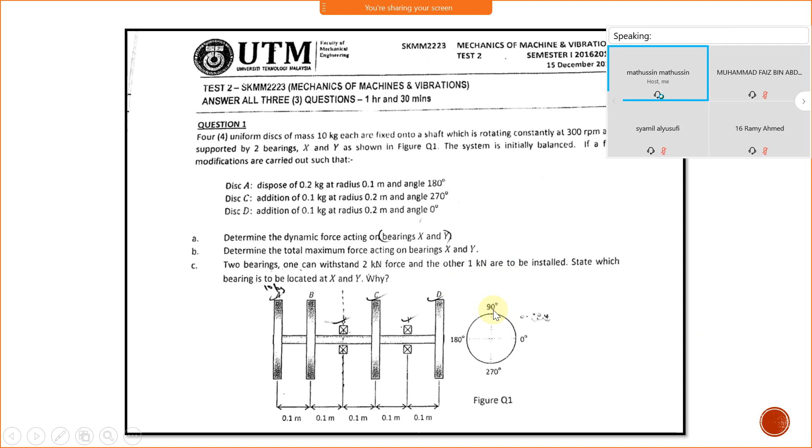Just we'll have a look at one or two questions regarding this topic. Okay, so we look at the first exercise. This one is from previous tests, from 2016 and 2017.

Alright, this is about question number 1, about balancing.

Okay, so we look at this one. Four uniform discs of mass 10 kg each are fixed onto a shaft which is rotating constantly at 300 rpm and supported by two bearings. Two bearings X and Y as shown in figure question 1. The system is initially balanced if a few modifications are carried out, such as...

A, we dispose of around 0.2 kg at radius 0.1 meter and angle 180 degree. Then we modify C by adding 0.1 kg at radius 0.2 meter and angle 270 degree. And last, we modify D by adding 0.1 kg as well at radius 0.2 meter and angle 0 degree. So this is our reference angle, right?

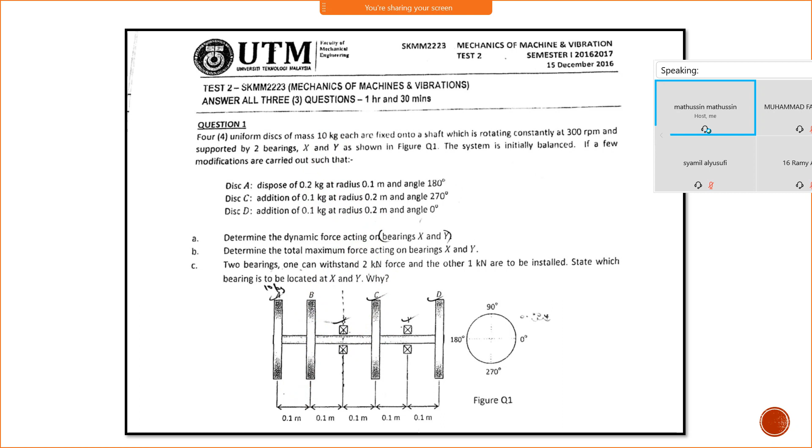So the first step is, of course, we need to tabulate our table, the MRD table. What we can include inside the table is, of course, we need to consider A, C and D, and also the reference of shaft, which is X and Y, because we need to find the dynamic force acting on bearings X and Y.

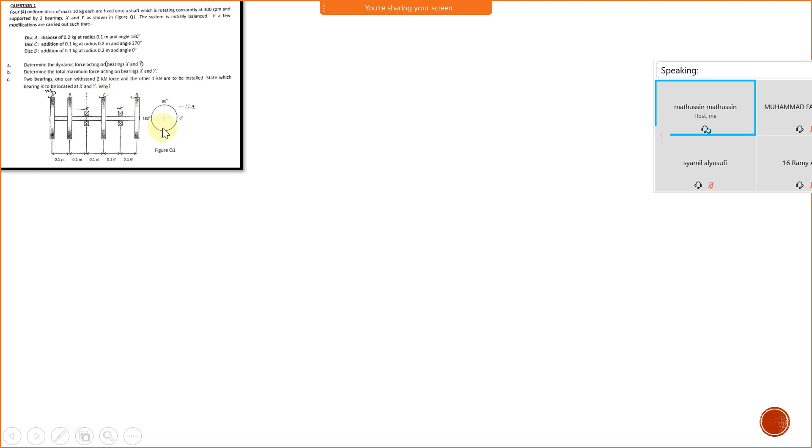Okay, so our table: just construct your table, the MRD table. We have plane, MR, D, MRD, and last we have theta. So this is plane, MR, D, MRD.

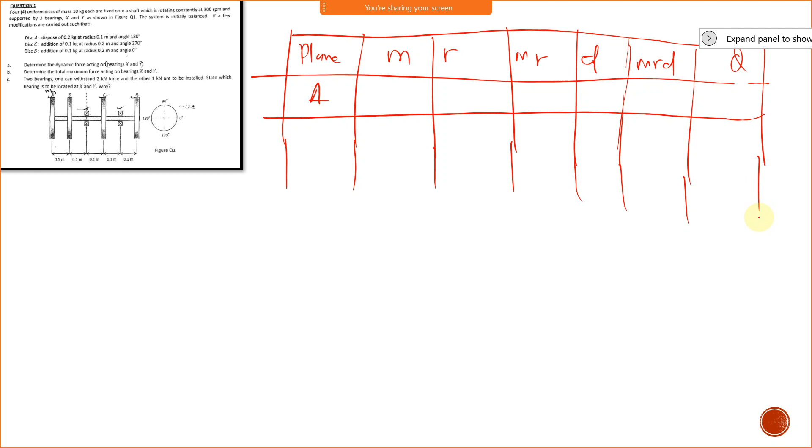Okay, we have plane A, and then we have reference, we have shaft X, and then we have C, and last we have D.

Okay, so what is our M of modification, which is negative 0.2? Dispose A with negative 0.2 kilogram, and then radius is 0.1, so what is our MR? Negative 0.02. And how about D?

Alright, D, we take X as our reference. You can choose either X or Y, it's up to you, but I think X is easier, isn't it? So what happens to our D of A, from X to this A? We assume negative to the left and positive to the right. So D of A is negative 0.2.

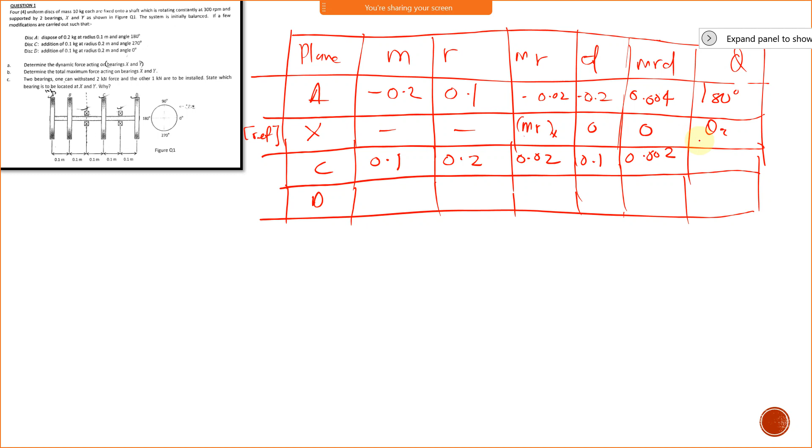And last we have D, which is 0.1. Positive or negative? Positive. And R is 0.2. MR is 0.02. And then D is 0.3, from reference to D, which is 0.3. MRD is 0.02 times 0.3, which gives 0.006 with angle 0 degree. So this is our MRD table.

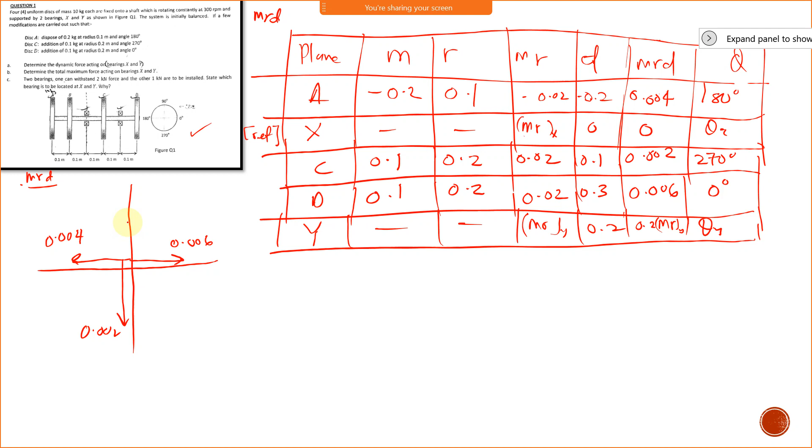So for this case we just resolve it to x and y components. Then what we have, first is this is our 0.2 MRY y, okay, and the other one is 0.2 MRY x. Okay, this is x and this is y. Then we just resolve it with x analysis.

All right, so we have 0.2 MRY x plus 0.006 minus 0.004 equals to 0. Then we can obtain the value of MRYX. So cuba kira dapat berapa? 0.006 minus 0.004 and then bahagi 0.2. So negative, isn't it? So negative 0.01. Negative meaning to say that MRYX must be 0.01 to the left.

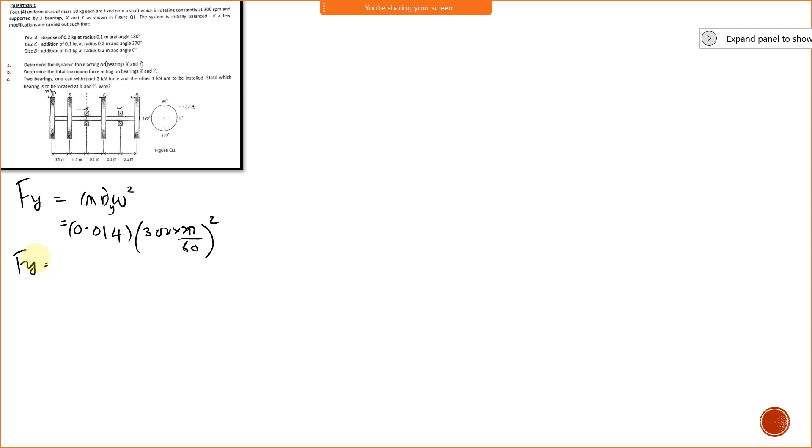Then our Fy must be 13.8 Newton, betul? 13.8 Newton with angle 45 degree. Okay, and then kita nak buat satu lagi MR analysis. This is MRD analysis, so this is MR analysis untuk dapatkan X pula.

Kalau tak perlu buat table baru, just refer to this table boleh juga. So for MR analysis we just take this one and refer to this one. Since kita dah dapatkan MRY tadi, just put it in our table, which must be 0.014 with angle 45 degree. Refer back to this table, then buat X analysis balik. So what we have, kita lukis balik.

Kita lukis balik, so kita ada MR negative 0.02 with angle 180. So negative maksudnya sini, tapi kita letak negative 0.02. This is for plane A, and then for MRX, unknown, kita skip dulu. Kita ambil C: we have 0.02 angle 270, which is downward, and then for D we have also 0.02 but angle is 0, betul? Then last one we have 0.014 with angle 45 degree.

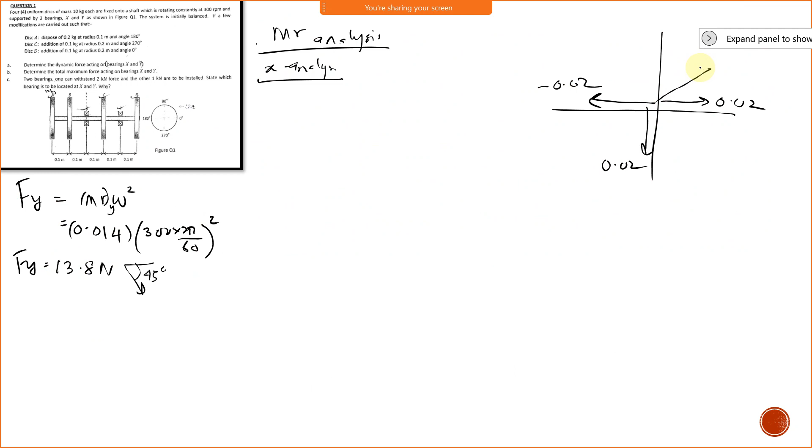45 degree kat mana? Refer balik dekat kita punya reference table dekat sini, then 0.014 must be somewhere here, 0.014. And last one we put our unknown. What is our unknown? We have MRX and MRY. So this is second quadrant. Apa dia? Second quadrant ni.

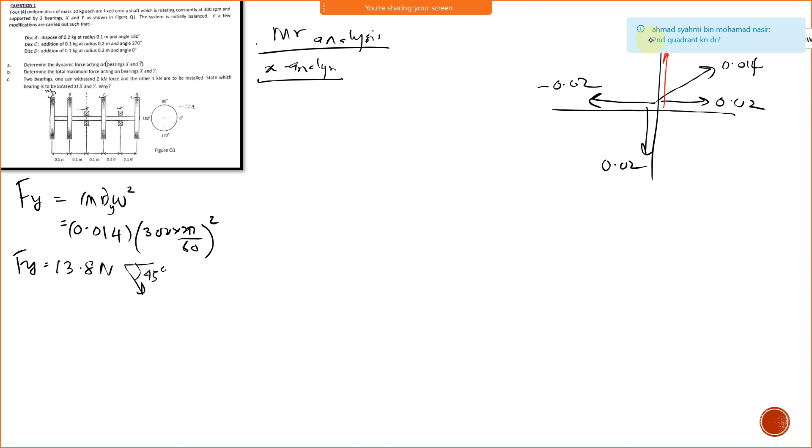Sorry. Untuk Y, oh sorry, betul-betul. Sebab kita dapat negatif kan. So our direction must be second quadrant, somewhere dekat sini, 45 degree. So 45 degree must be second quadrant because MRY is negative, so kena hati-hati dekat sini. You must be very careful on that point. So it should be second quadrant.

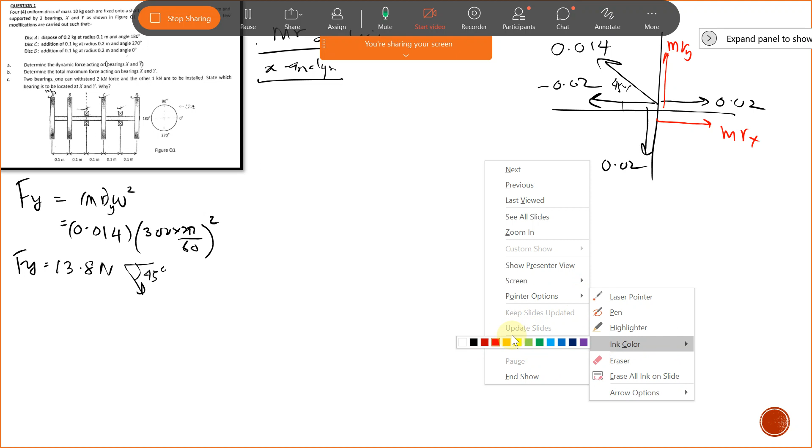45 somewhere here. So 0.014. Okay, with 45 degree. Alright, okay. So next is, so we have MR, MRY, and then we have MRX. Okay, so what we have is, for X analysis, what we have: MRX, sorry, should be MRXY. So this is MRXX. Okay, so MRXX.

MRXX plus 0.02 minus 0.014 cos 45 minus negative 0.02 equals to 0. Okay, so then we can obtain what is our MRXX. So berapa? Cuba kira. So we have 0.02 minus 0.014 cos 45 plus 0.02, then we have a negative, isn't it? So negative 0.03. Okay, and then after that we need to find Y analysis pula.

So what we have: MRXY plus 0.014 sine 45 minus 0.02 equals to 0. 0.01. Yang mana ni 0.1 ni? Jawapan dia ke? 0.01 ke 0.0? Okey, MRY: 0.014 sin 45, negative 0.01. So 0.01. Syami ni advance sangat ni.

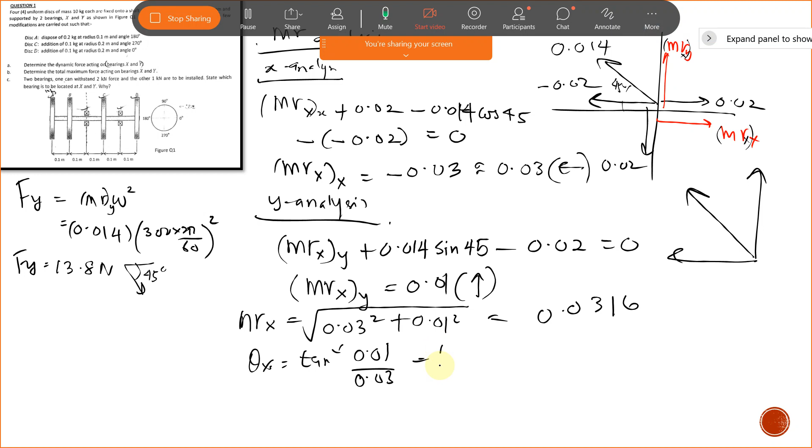Then what is our angle? Inverse tangent 0.01 divided by 0.03, 18.43 degree. Alright, so once we get MR, then we can actually find what is our Fx, which is MRX omega squared. Kat sini salah ni, should be sini kan, 45 degree.

Okay, this one, 0.0316 times 300 times 2 pi over 60 squared. So Fx must be 300 times 2 pi over 60 squared times 0.0316. So 31.2 Newton with angle 18.43 degree. So this is our answer for A. Okay, any question?

Tak perlu, kalau nak buat pun boleh. Alright, tak perlu. Nak buat pun tak ada masalah. No need to worry about it. Sebab sama je, kalau kita construct MR table, then we just only take up to MR, and then we consider theta. No need to consider D.

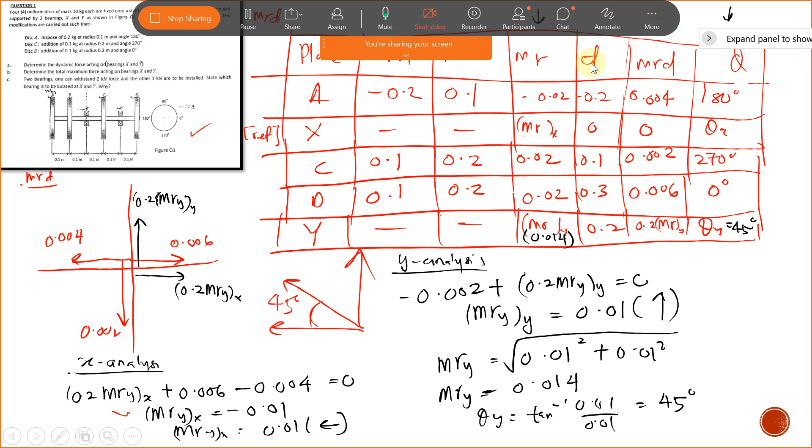Is there any way to reconfirm our answer, either right or wrong? Macam mana nak confirm? Boleh, you can actually do another method, which is polygon method, by using a real scale. For example, if you assume 1 cm equivalent to 0.01 kilogram meter, then you can construct the polygon shape, because from there you can reconfirm that your answer is correct or not, because at the end the answer must be the same.

You can study how to use that method, because I think the method is already mentioned in your module, isn't it? But I not recommend you to use that method, because it involves real scale. So kalau guna skala yang salah, maksudnya salah jawapan. But this method is the easiest way, I think, to get the answer. Tapi boleh try, tak ada masalah. You can try it by your own. Any other question? No?

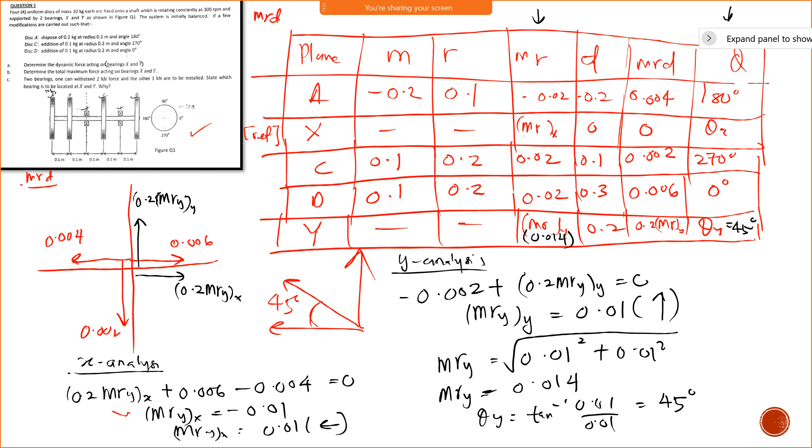Okay, question number B. I think this is very critical, because we need to find the total maximum force acting on bearings X and Y. So macam mana nak buat? If we're talking about total maximum force, we need to consider two types of forces. First is dynamic force, and the other one is static force.

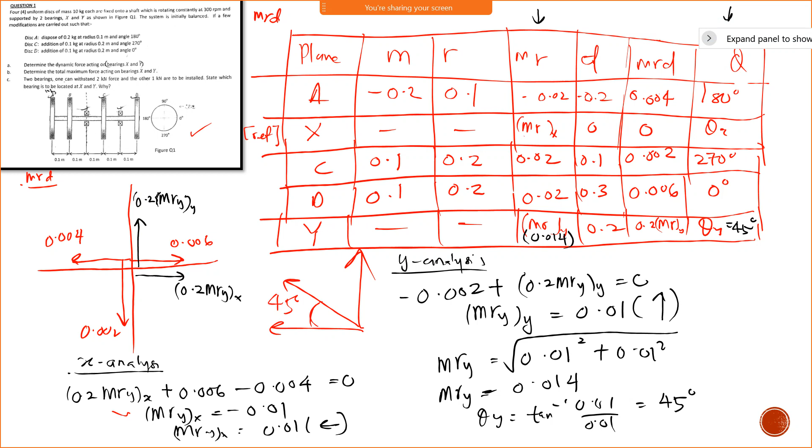How to find it? We do some analysis on the shaft first. This is our shaft, question number B. So for static analysis, we always assume that the direction of reaction force acting on the shaft must be always acting downward, opposite to the reaction acting on the bearing. Direction dia tak sama arah lah.

So apa yang kita ada: point A dekat sini, we have point B, we have bearing X, and then we have C, we have Y, and we have D. So how to consider our value of mass?

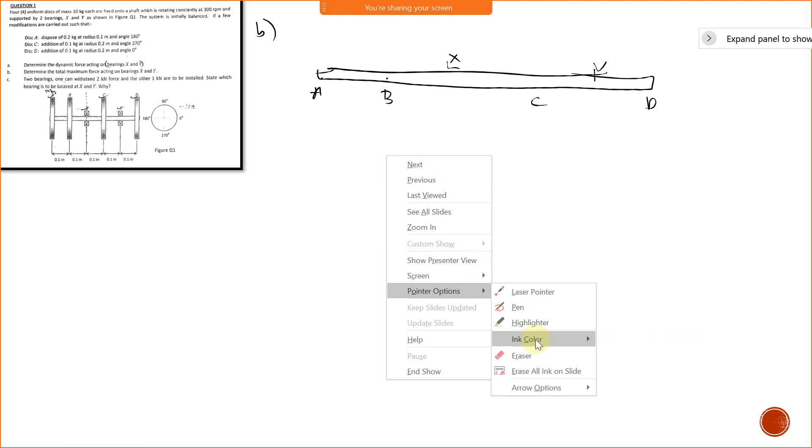What is our A? A adalah dia dah dispose kan, so apa baki mass yang tinggal? Siapa yang tanya semalam should we use 10 kg ataupun kita kena guna mass yang dah dimodified? Alright, so saya beritahu semalam kena guna 10 kan, but the right answer is you need to use the mass after modification. Because the question is regarding the mass after modification, not before modification.

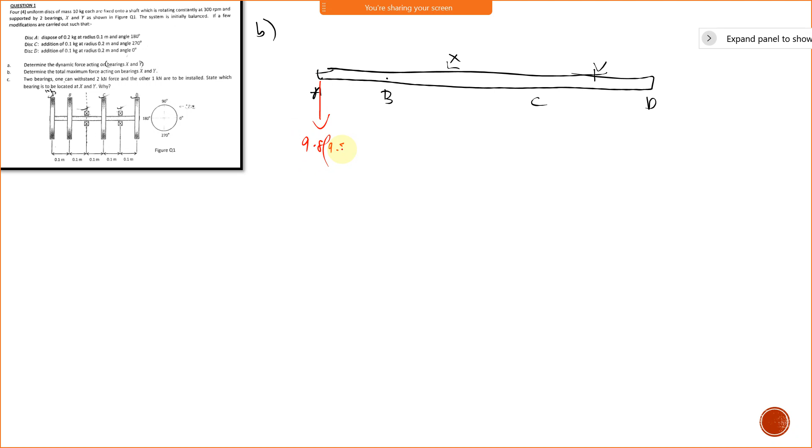So mass of A should be berapa after dispose? So what is our mass left? Berapa? Sepuluh tolak dengan 0.2 kan, so should be 9.8 acting downward. So 9.8, 9.81, which is g. Okay, and our distance is 0.1 over here.

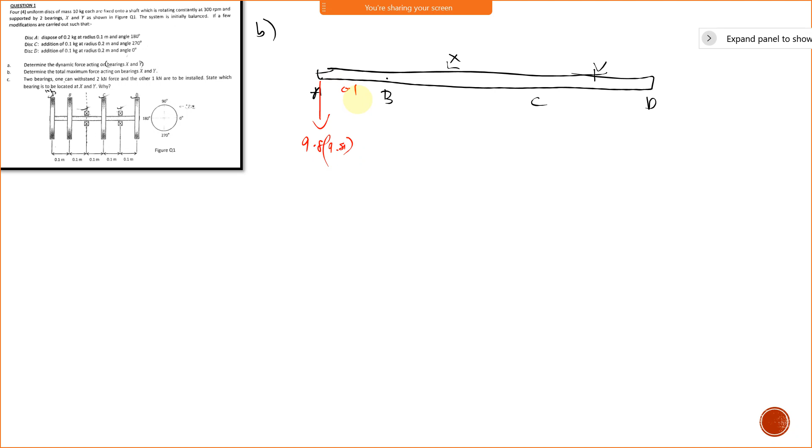And how about B? No modification on this B. So what is our mass for B? Maintain 10 kilograms. So 10 times 9.81. How about C? C is addition, so we have 10.1. Betul? 10.1, 9.81. And then last one we have D, also addition: 10.1, 9.81.

With shaft reaction Rx upward and Ry also upward. Okay, we do analysis on the shaft, not on the bearing. Then at the end of our answer, you just need to change your direction of reaction at X and Y. So distance is 0.1, X to C also 0.1, this is 0.1, 0.1.

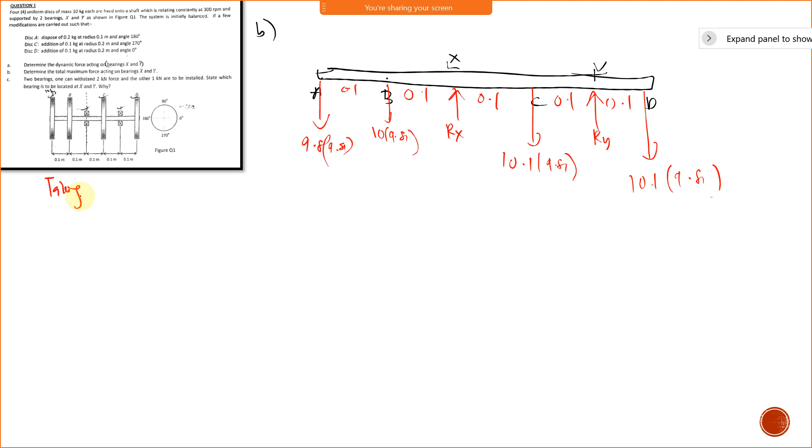Okay, so taking moment about any point, for example, about point Y. We assume positive to clockwise. So first we have negative 9.8 times 9.81 times distance from Y to A. Berapa? 0.4. And negative 10 times 9.81, distance is 0.3. And then we have plus Rx, distance is 0.2.

Okay, and then apa lagi? Kita ada negative 10.1 times 9.81, distance is 0.1. And last one we have positive 10.1 times 9.81 times 0.1 equals to 0. Alright, cuba dapatkan what is our Rx. Find what is our Rx.

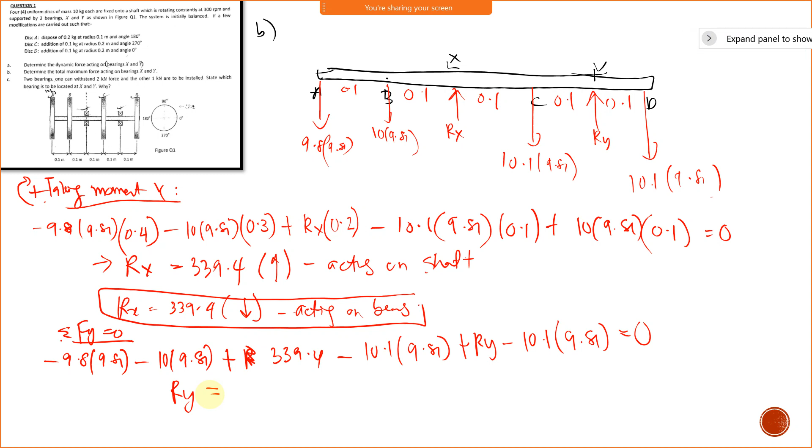So 339.4 minus 10.1 times 9.81 plus Ry minus 10.1 times 9.81 equals to 0. Alright, so dapatkan your Ry berapa? 53, betul eh? Cik Syami je jawab, yang lain mana ni? Betul eh? 53.

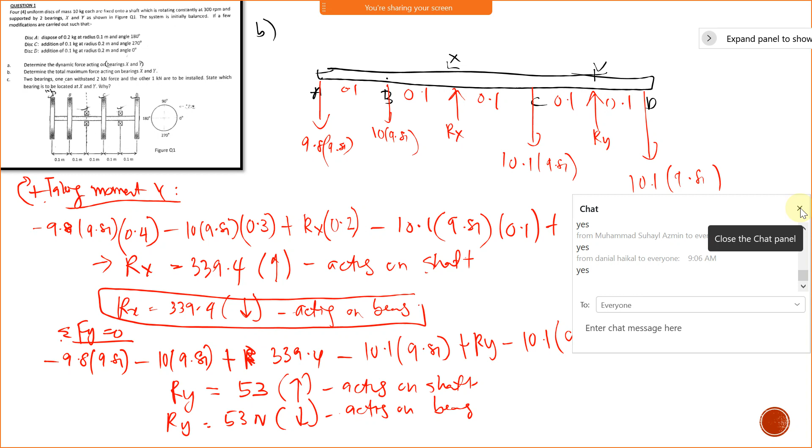53, direction is upward, acting on shaft. So Ry acting on bearing must be 53 Newton downward. Alright, so this is not a maximum. How to find the maximum force acting on bearings? You need to combine your dynamic force and also static force. What we did is analysis of static force, right?

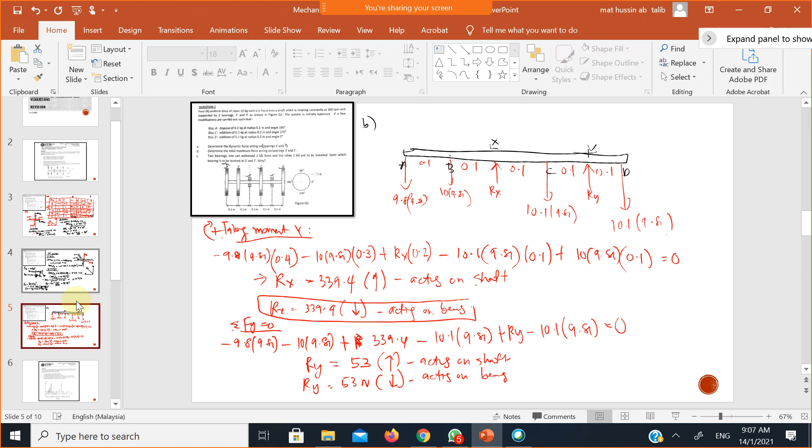Sekejap, saya tambah satu lagi. So how to find the maximum force acting on bearings X and Y? Total maximum force should be dynamic force plus static force. So kena hati-hati, kena fahamkan soalan betul-betul apa yang dia nak.

Kalau dia beritahu maximum force ataupun maximum dynamic force, those are two different things, you must know. But the question is, we need to find total maximum force, maksudnya total maximum daripada dynamic force dan juga static force. So F max for X should be, berapa kita dah kira tadi? Fx tadi berapa, yang mana?

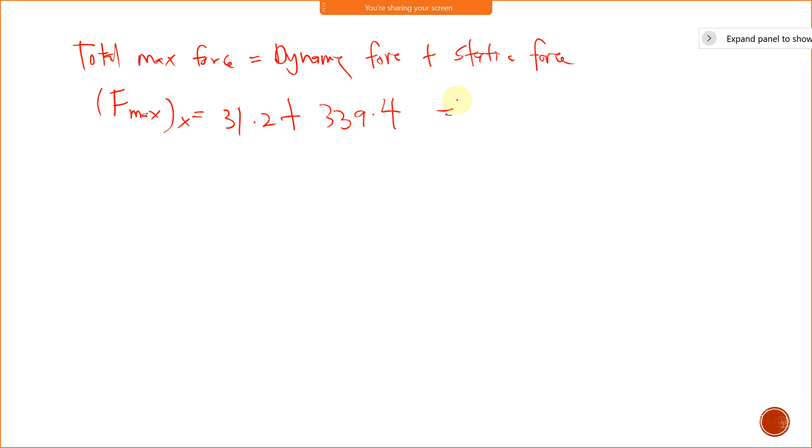31.2 plus Rx, 339.4, betul. So what is our answer? 31.2 plus 339.4, then the answer should be 370.6

Newton. And F maximum for Y should be: the dynamic force for Y is 13.8 plus maximum static force for Y is 53. So the answer must be 13.8 plus 53, so 66.8 Newton. So that is our answer. Alright, is that clear? Ada soalan nak tanya?

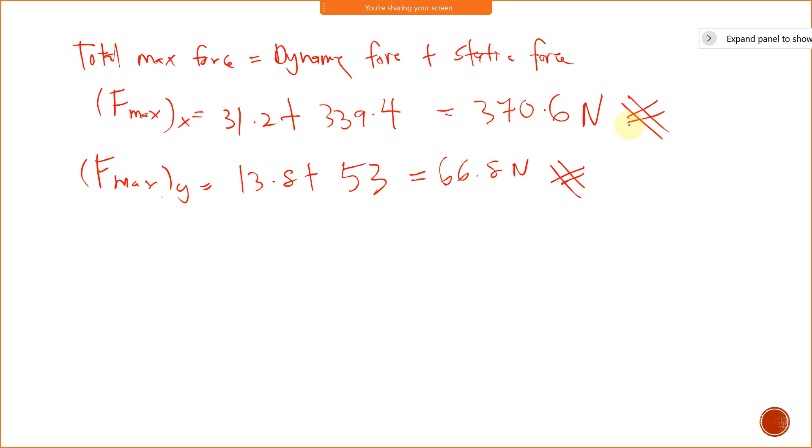Okay, soalan C, dia beritahu apa kat situ? Two bearings, one can withstand 2 kN force and the other one 1 kN are to be installed. State which bearing is to be located at X and Y. So bearing yang ada 2 kN, yang mana yang lebih sesuai untuk kita install, sama ada dekat position X or Y. Bearing 2 kN, which point? X or Y should be installed yang 2 kilonewton.

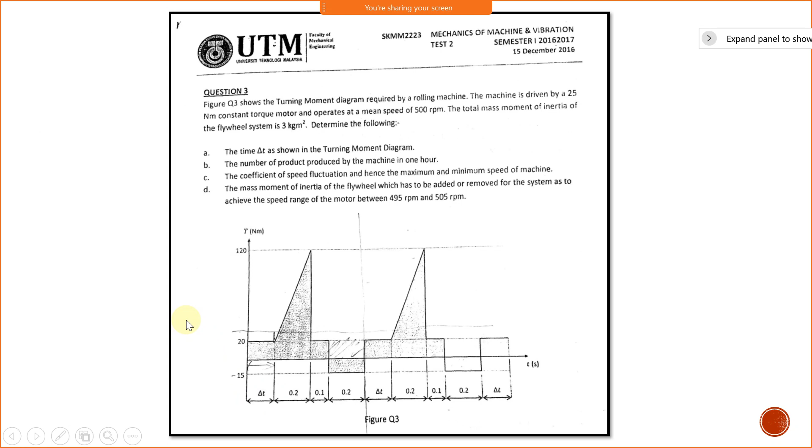Okay, so first adalah we are given T apa? Kita ada T mean, isn't it? T mean is given 500. T mean pula. Kita ada T mean is 25 Nm and also we have mean speed. Omega mean is 500 rpm. Okay, so total mass moment of inertia of the flywheel system is 3 kg meter squared.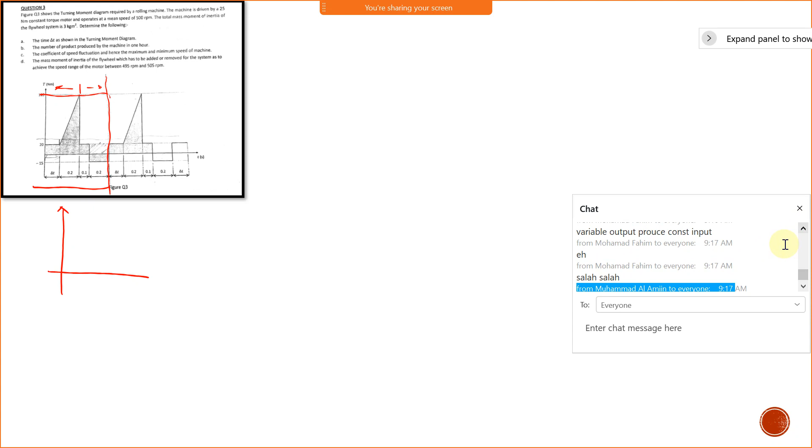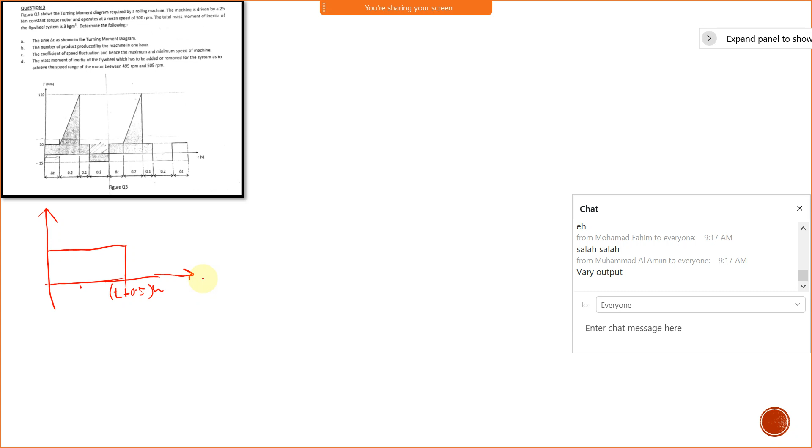Okay. So this is one complete cycle. Alright, kita tak tahu one complete cycle kat sini. Kita ada delta T. T plus berapa ni? One complete cycle 0.5 kan? So this one should be T plus 0.5 omega. Alright, you need to make sure that this one must be in terms of theta lah. Theta equals to T omega. Okay, so this is our T mean by T constant is 25 equals to, saya buat kat bawah lah, equals to, we have 20.

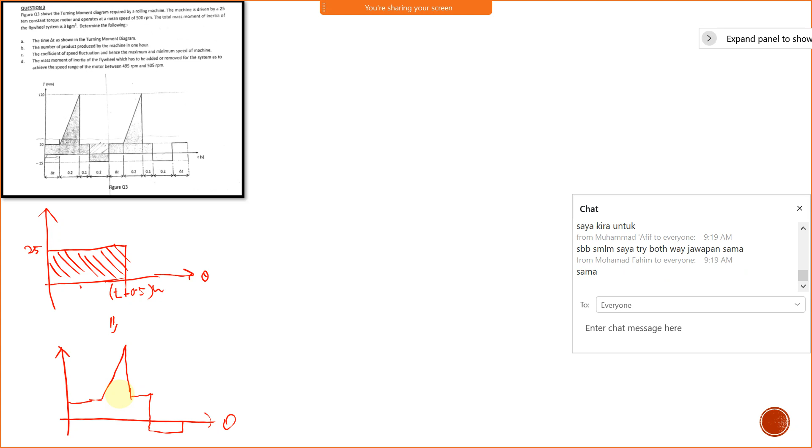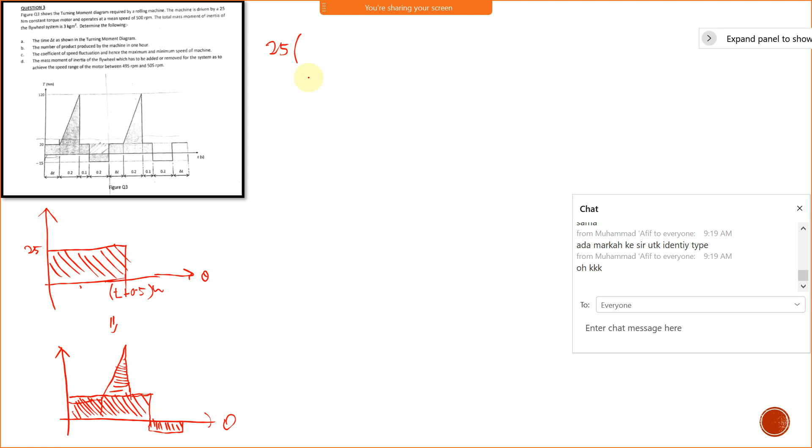So kita bagikan yang mana yang paling senang, kita bagi macam ni lah. This is our first area, this is our second area, and this is our third area. Okay, boleh? So kita ada T mean 25 times with T plus 0.5 omega equals to, yang kat bawah macam mana? Kita ada 20. Nombor 1, nombor 2, nombor 3. So we have 20 times with T plus 0.3. Is that correct? 20 times T plus 0.3, this area.

And then as number 2 kat sini berapa? Plus 1 over 2 times 0.2 times with tinggi adalah 100. Betul? 100. Is that correct? Okay. And last one, kita ada yang dekat bawah should be plus negative. Ni you need to consider negative lah. Negative 15 times with 0.2 equals to 0. Sorry, tertinggal omega. Alright, omega. So, dapatkan T. So, what is our T?

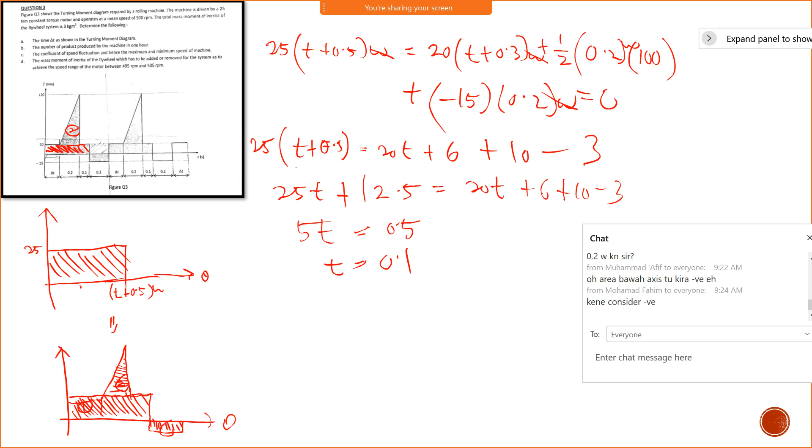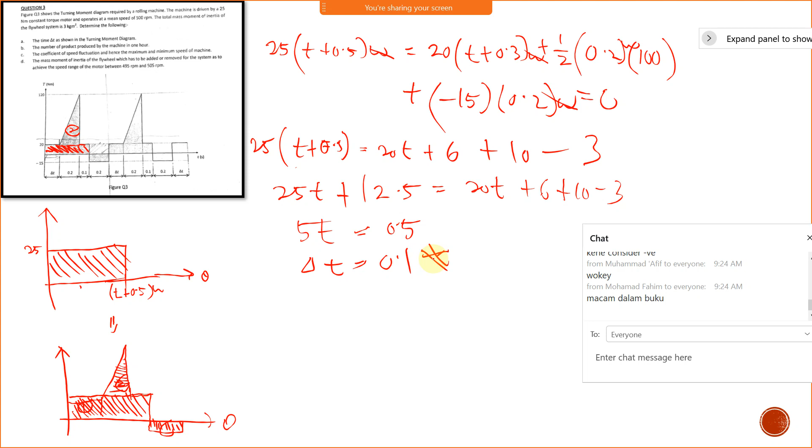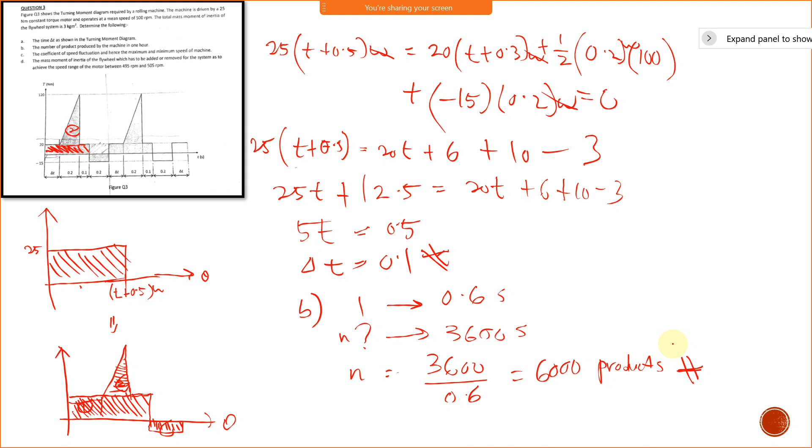Let's say this is n, so we can find n. n should be 3600 divided by 0.6, then n should be 6000 products. Is that correct? 6000 products, okay, 6000 products. Alright, so next, C.

The coefficient of speed fluctuation and hence the maximum and minimum speed of machine. So how to find coefficient of speed fluctuation? From here we need to proceed to the next step, which is we superimpose our graph.

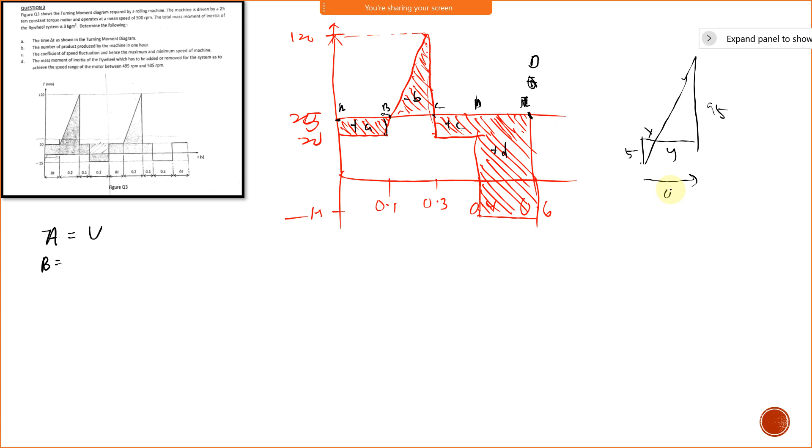0.2. So we get X over 5 equals to 0.2 over

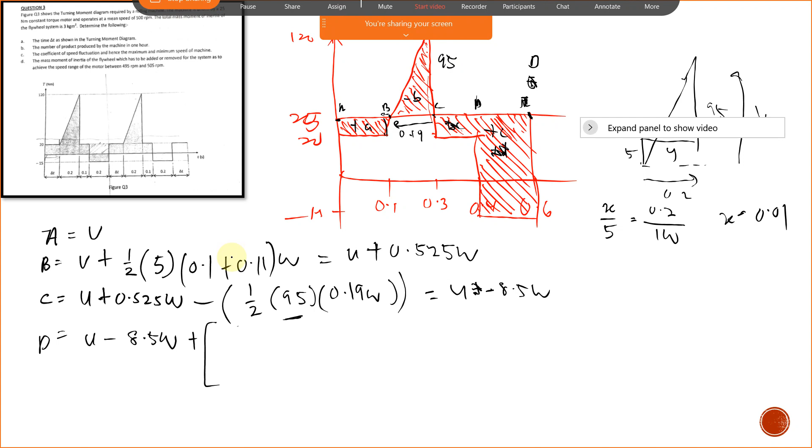5 times with C to D, 0.1 plus 15 added with 25, which is 40, 40 times with 0.2 omega.

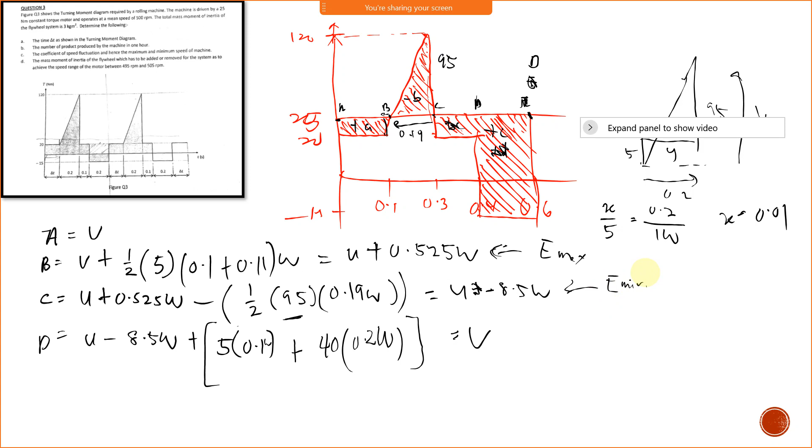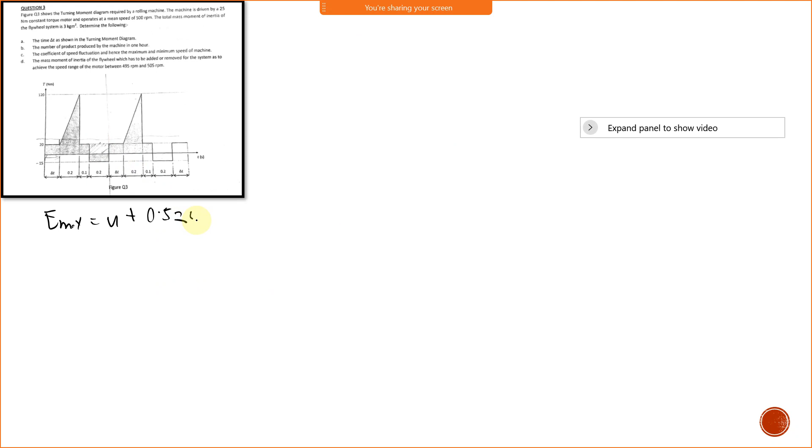Alright, E max is U plus, so E max is U plus 0.525 omega. E min is U minus 8.5 omega. Alright, so from here we can actually find what is our beta E, which is E max minus E min.

So we have U plus 0.525 omega minus U, that becomes plus 8.5 omega. Then what is our BE? Should be 9.025 omega. Is that correct? So from there what do we want to get?

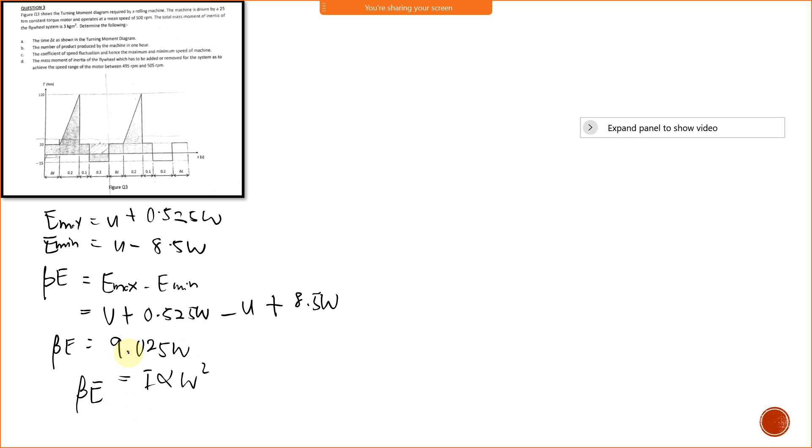Coefficient of speed fluctuation, which is alpha. Based on the equation we have, BE equals I alpha omega square. Is that correct? I alpha omega square, then we get our answer of alpha using this equation.

So we have 9.025 omega equals I. I is given as 3, alpha, times omega square. So cancel out omega, then we can obtain what's the alpha.

9.025 over 3 alpha. Omega is given as 500, convert to radian per second. So what do we get for alpha? 0.057. So meaning our alpha should be 0.057 times 100. So percentage of coefficient should be 5.7%. So this is our answer.

Okay, and D, the last one, the mass moment of inertia of flywheel which has to be added or removed for the system to achieve the speed range of the motor between 495 and 505. We want to get mass moment of inertia of flywheel.

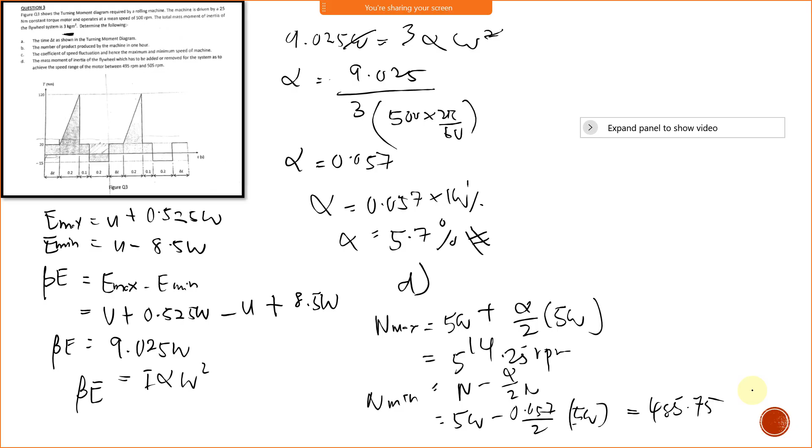So this is our n min. So how do we find our new mass moment of inertia that should be added or removed?

Okay, so get n mean. N mean we already have 500, and we get the n maximum and n minimum that is given. So n minimum is 495 and maximum is 505.

And we can get n mean using the equation, n maximum plus n minimum divided by 2, and we get 500 rpm too, same. Only the difference is we've changed the n max and n min.

So from there we can actually get alpha using the formula too. So n maximum minus n minimum divided by n mean. So alpha we will get 0.02.

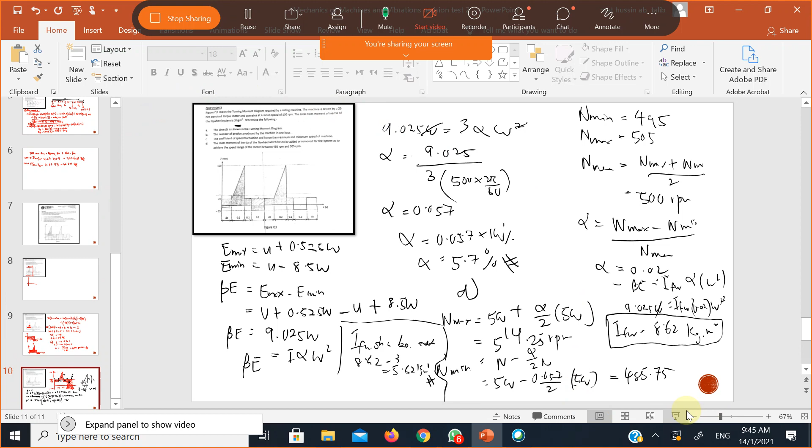Macam mana boleh dapat area dekat B? Mana B? Yang kita consider ini kan, 1/2 darab dengan 95 darab dengan 0.19. Yang ni ke yang masukkan?

95 tinggi from C to sini, 95 kan, 120 tolak dengan 25, so dapatlah 95 kat sini. Okey, yang ni pula distance from B to C ni kita dah kira tadi.

X ni consider daripada sini, nampak yang kecil yang saya buat ni adalah 0.01. Jadi distance daripada point B ke sini should be 0.2 minus 0.01. So kita dapat 0.19 distance from X dekat horizontal ni. Boleh? So dapatlah

Jawapan dia U minus 8.5 omega. Alright.

Yang 0.1 plus 0.11. Yang ni area dekat B. Okay, this one yang trapezoidal ni. Okay, kan dia punya trapezium. Alright.

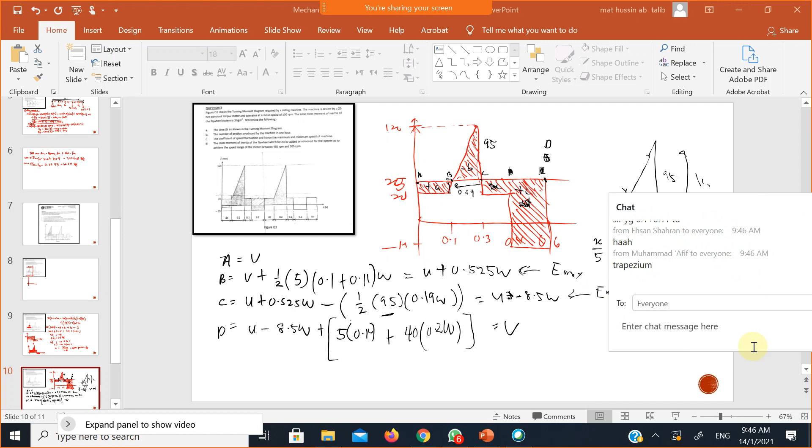Dia punya area of trapezium. Alright, so kat sini adalah 0.1. Kat atas ni 0.11, dekat bawah ni 5. Okay. So dapatlah jawapan dia. Okay.

Kita buat macam hari tu. Alright, kita buat macam tu. Tak perlu buka cam lah.

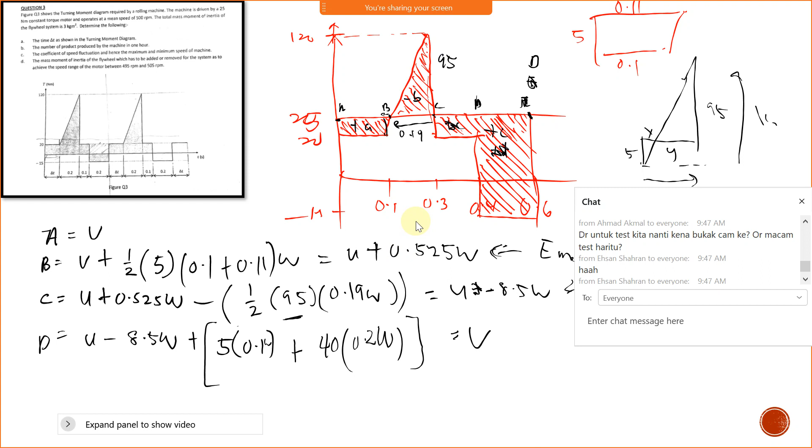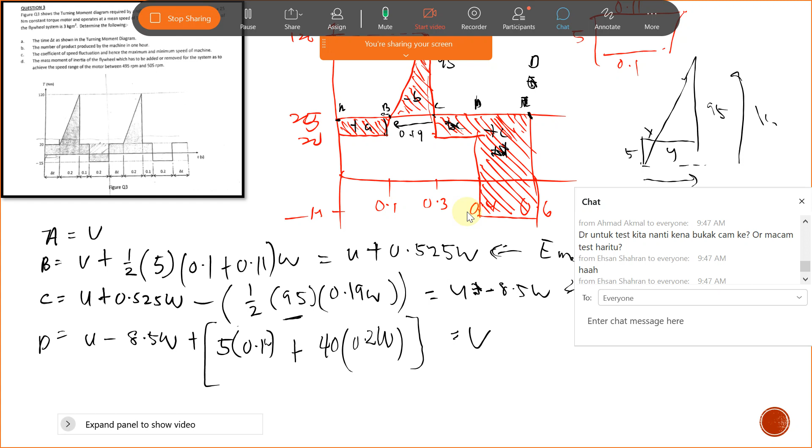Yang alpha yang baru tu, kenapa? Dia omega ke omega max tolak omega min, ke n max tolak n min? Sama je, dapat yang sama juga. Sama je, alright, sama je.

Cuma kalau n max dia dalam bentuk RPM, omega dalam bentuk radian per second. Alright, selalu kalau kita buat omega, then kita akan dapat jawapan yang sama. Tapi rumus yang officialnya kita guna n lah, n maximum dalam bentuk RPM. Okay, tapi don't worry, jawapan akan sama juga kalau guna omega pun.

Okay, boleh? Okay, terima kasih. Yes, yang formula n min sama dengan n tolak alpha over 2n tu dari mana?

Daripada sini, yang n max sekali. This one, mana? N daripada alpha ni. Dari sini saya modify equation ni, dapatlah yang macam ni. Mana? Oh okay, ni equation yang penting ni. N min dengan alpha ni, equation alpha. So untuk dapatkan